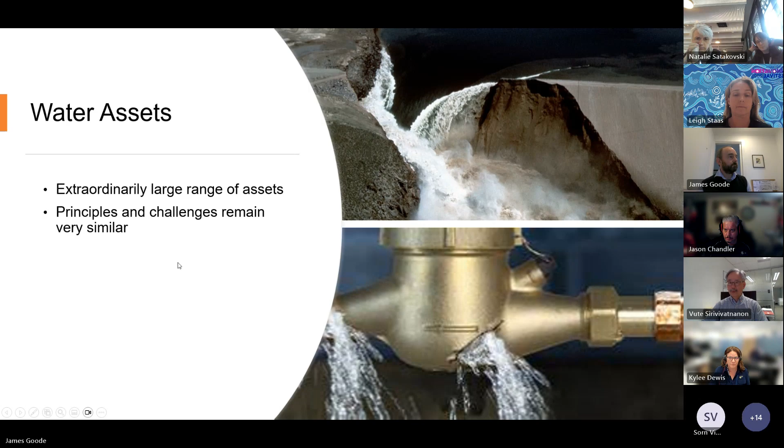One of my roles within WSAA is to manage an asset management network. So we get the asset managers from the various utilities across the country together, and we talk about asset management topics. These topics tend to be high level, not focusing on individual assets, but on the asset management process. I thought I'd take you through some of the recent discussion topics. The first one on that list is resilience and climate change.

It's been a big challenge for the industry, how we adapt to the greater impact that the environment's having on our assets, the fact that we can't make decisions based on historic information so much, and how we need to think about our network as a system. It's not just a pump that needs to be fixed. It's the pump, the pipe, the whole system that's supplying water or pumping away sewage. So there's a bit of a change for the industry in that regard.

Data and analytics is a massive one. You're going to see that come up again and again in my presentation, and it's possibly more relevant to this group. There's huge scope for us to make better decisions with the data that we collect on our assets and how we analyse that data.

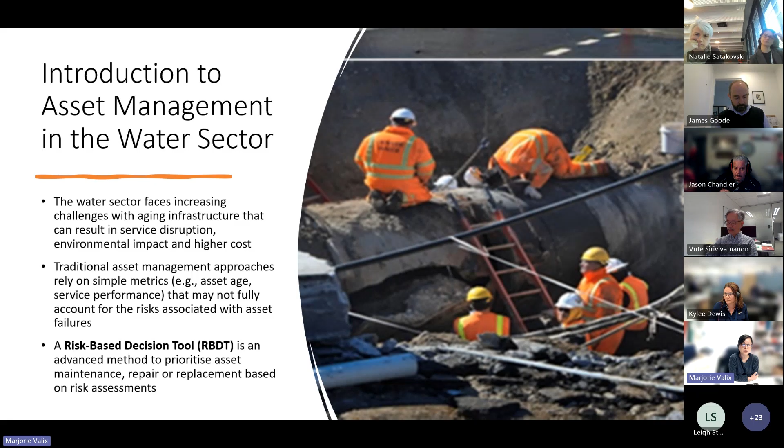So the role of an RBDT, or a risk-based decision tool, is to provide a framework by which the utilities can develop a risk framework for the facility to assess the risk based on the likelihood or chance of the asset failing, and also the potential consequence of that failure.

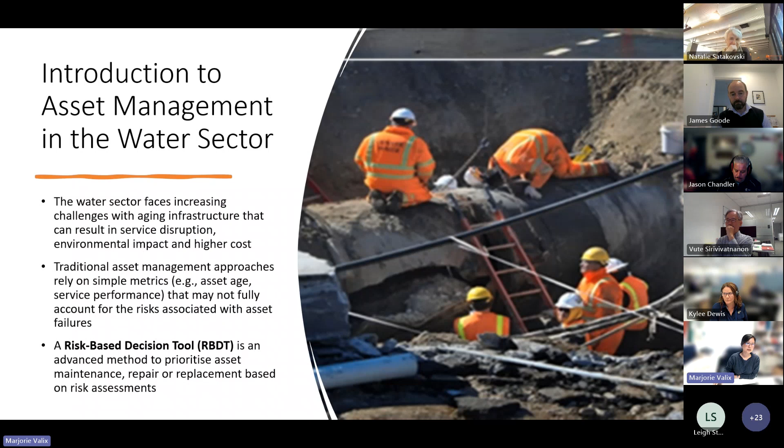So to make it more explicit, what do we mean by a risk-based decision tool? It's really a framework by which the utilities try to capture the risk profile among their asset cohort by looking at the chance of failure of that asset and the impact of that failure. The key features often involve risk calculation, the likelihood of failure and consequence of failure, and prioritization by looking at the risk matrix associated with those assets.

It can also deliver things like cost effectiveness analysis by enabling the utilities to evaluate the cost options of, for example, repair or replacement. They can also do scenario analysis, for example, when considering aging assets, or perhaps climate change and the impact of that.

Now, the key focus of our work, although we know there are already risk-based decision tools, is to push the idea of an evidence-based decision tool. Evidence-based decision tools are essentially service life models, built on understanding of the mechanisms of failure, including physical, chemical, and kinetic models. Why would you need an evidence-based decision tool? The current challenges with the current RBDT are typically around data availability and quality.

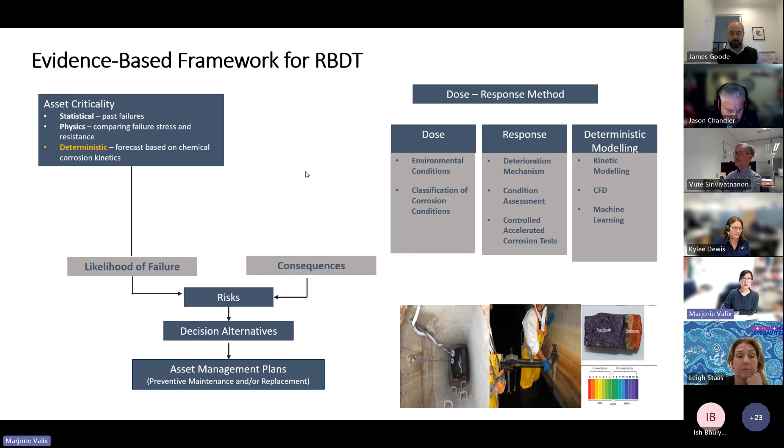As an example for the sewer environment, we know that the gas phase resulting from microbiological activities contributes to the corrosion on the gas phase of most sewer pipes. Previously there was only one classification for the corrosivity of sewer assets, where it was simply considered an extreme environment. Part of the work we've done is looking through various types of assets in Australia, and doing surveys of environmental condition followed by condition assessment.

We've come up with a set of classifications, which classifies the risk associated with these environmental conditions based on the gas concentrations, H2S and CO2, the temperature and relative humidity. It provides a classification from C1 to C5, ranking from very low to very high corrosion impact. From that, we can also predict the OPC depth of corrosion based on the relative corrosivity.

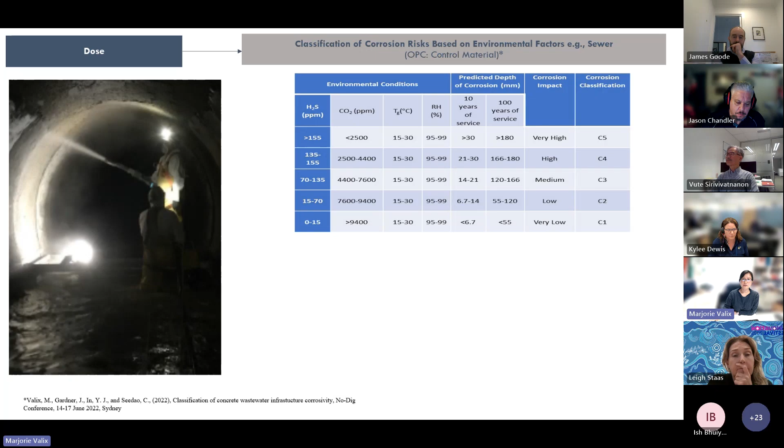We've also verified this corrosivity rating by installing different types of non-OPC material in these different environments, to verify whether the relative corrosivity we've observed is consistent. And what we can see is that it is consistent.

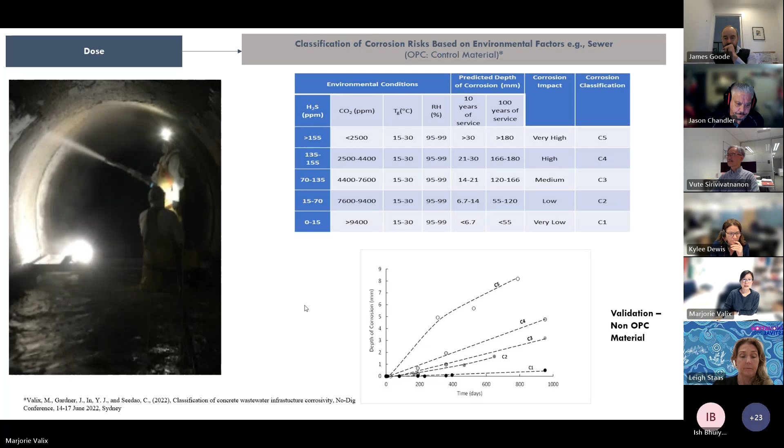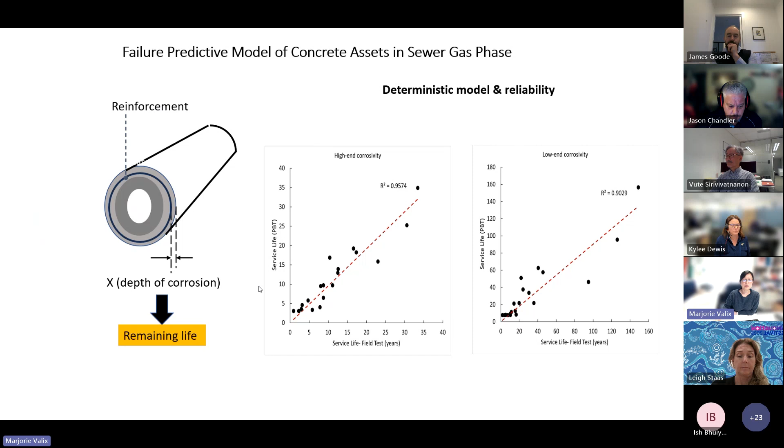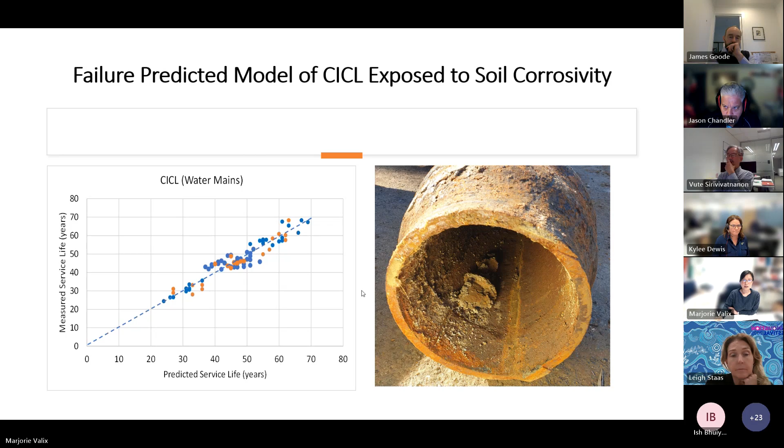And part of the work that we're also trying to do is to actually now start mapping these types of data and service models using the GIS. So essentially, the GIS gives us an overlay of the service data, and it allows us to develop almost like a heat map, or to identify the areas of asset concentrations where there's a high risk of failure. And in a way, this also enables us to verify whether our assumptions about the soil impact on the corrosion are correct.

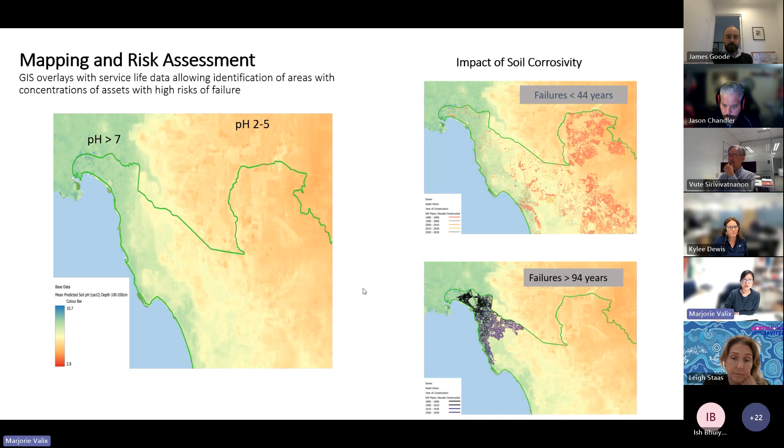So for example, for this particular study, we're looking at the impact of the soil pH. The green here is where the soil pH is greater than 7, and the orange is where the pH is more around 2 to 5. And if we then overlay the actual assets which have failed in less than 44 years, they are consistently within the area which is highly acidic soil, whereas those assets which have failed after 94 years are concentrated in the region which is less acidic, which again confirms the impact of soil corrosivity.

Okay, so what we could see here is that there are benefits to the evidence-based decision tools. There's more accurate and context-specific assessment. Essentially, the precise evaluation based on real-time data and specific asset condition can lead to better prioritization of resources and provide a much more targeted intervention.

And although the traditional RBDT method focused on more static and historical failure data, the evidence-based tool can actually enable the integration of new data. What that means is that it allows the utility to proactively improve and increase the robustness of those tools. And they're able to therefore predict and prevent asset failure before it actually happens. And so this shift from reactive to proactive maintenance reduces the downtime and long-term costs.

The other aspect is the enhanced transparency and justification. Now, if we have an RBDT which doesn't rely on an evidence base, it's actually very difficult to justify why the actual failure occurred. So having this offers a much clearer rationale for utilities to make their decisions. They're able to provide a better way of communicating with stakeholders and regulators, because the information they're providing is based on clear, data- and evidence-backed explanation.